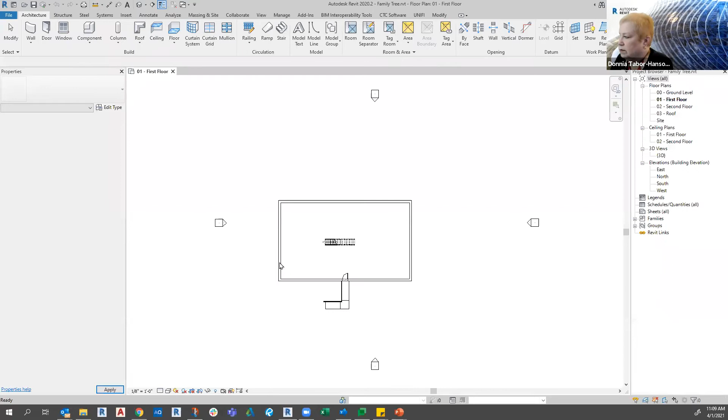So let's pop over to Revit. I'm going to open up my family tree project that I've set up just to play around with. You're going to see some of the basic things that we would see — I've got some walls, doors, a ramp, a stair in here. To see what it is in 3D, you can come here and see what we've got. These are all families that are system families, except for the door and the window — these are all system families built in.

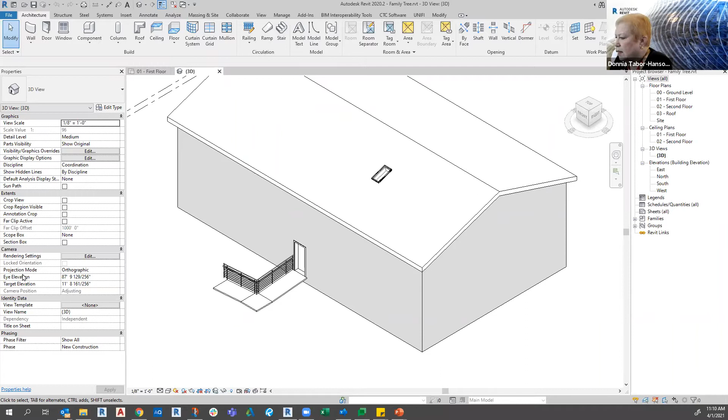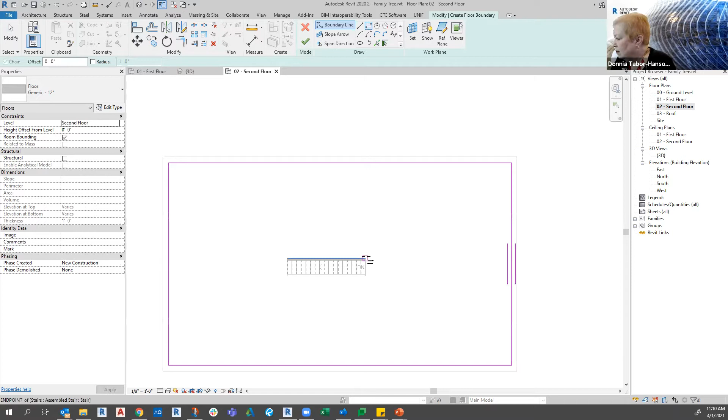So let's go and see how some of these families interact. On the second floor, I know I don't have a floor, so as a system family, I can come up here and go to floor. When I'm on my pick walls, I can hover, tab, pick. Y'all know how to do this. Let's make sure that I get a space for my stairwell.

Yeah, that's pretty good. Well, let's go 10 on that and close it. And then let's just drop a section view. Yeah, we'll let it go ahead and cut into it.

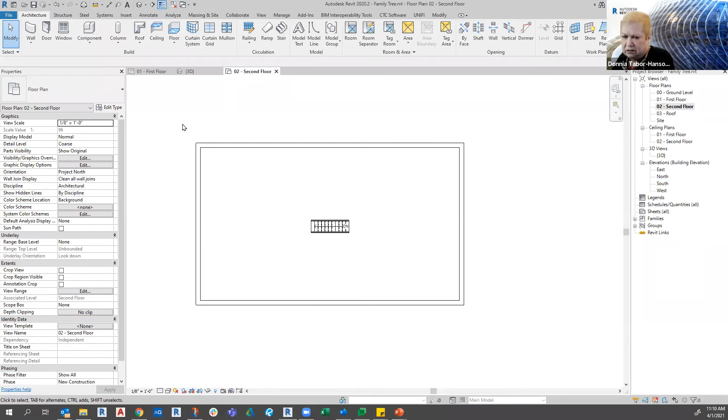See, these families know how to react with each other. That's one thing that's so nice about Revit families is they're not so dysfunctional at times. They actually play together nicely, right? So I'm gonna drop a section in here and let's look at how these system families are playing together and acting nicely. Oh, I'm not gonna see much in a coarse view, so let's go to a fine view.

I thought I told that to interact with the walls. I obviously didn't. No, okay. Anyway, no, didn't mean to go there.

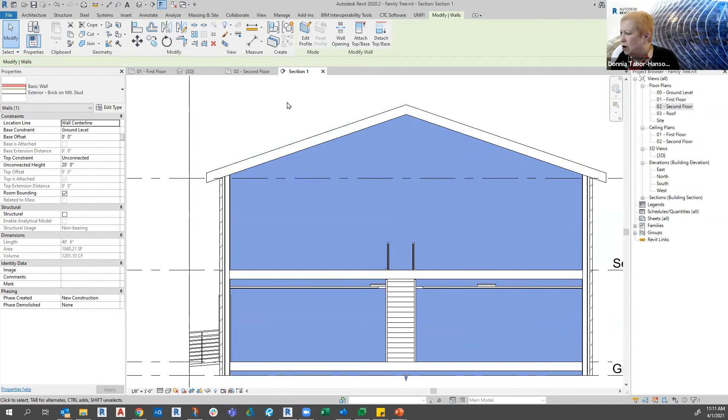You see the wall is connected up here to the roof. I didn't interact my floor with my walls. I'm not going to go back and redo that, you've seen that many times. So, you know, Revit is so smart. It's almost as smart as some of my grandkids. So that's why we know it's very smart and how it interacts with things.

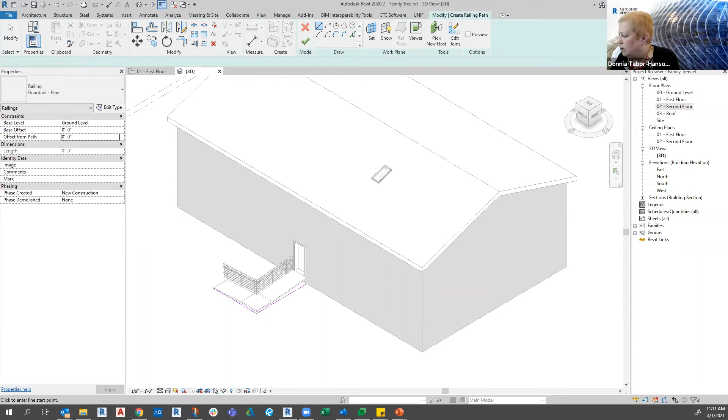And then there's also how we can look at a family that is hosted but is also a system family, like a rail. I'm going to use one of my favorite shortcuts, CS, after selecting that. And then I can just use pick line and come around here. And I know some of you are going, that's not working, right? Because let's see, I'm gonna go out a foot on that.

And when I finish that rail, well, that's not so smart because I didn't pick its host to begin with. So now let's go pick its host. You see how smart it can be? It gets these families going. They're so smart working with each other.

So now let's go look at some of the component families. This is where we're talking about building templates. So for the component sections, there's some components that need a host, like doors, windows, light fixtures. Some components will just go on the current level and they'll be happy to reside there. They're just, okay, fine, you just put me there, I'm so happy.

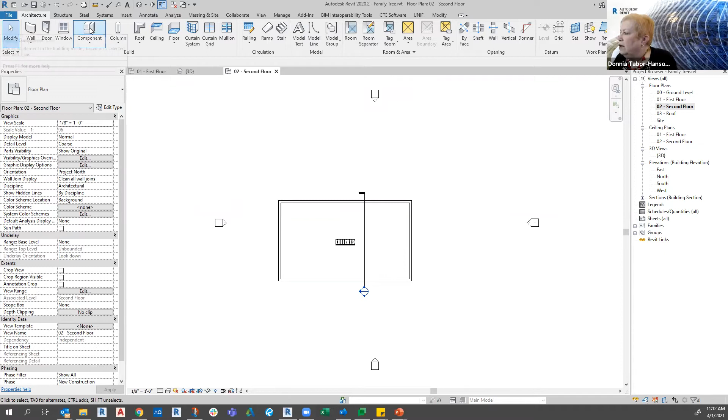And a lot of times these loaded components are loaded from outside of Revit by an RFA family type. And it does matter how you load some of these families. So I'm going to go back over here and let's go to the second floor again. Let's put it on the second floor for some reason. And if you go to component and you say load family, you're going to be presented with where the families are. And let's say I want to go get some windows.

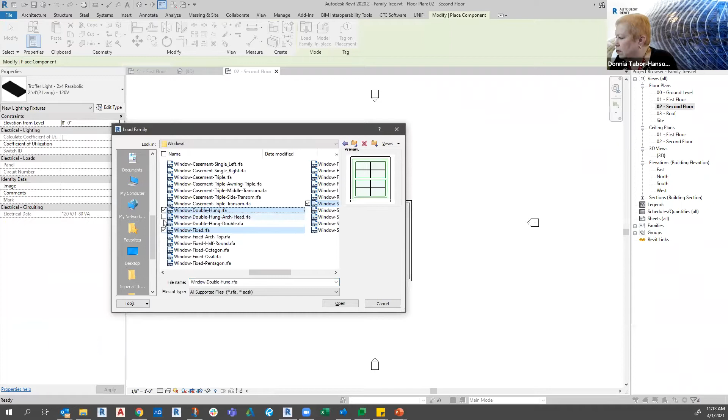I want to get a single hung and some fixed, just a plain fixed family. Yeah, it may be a double hung. And I'm selecting by holding the control key and selecting three of them. And then it brings me up here and I can go to the double hung family and pick on, and somebody just says, oh my gosh, I've never seen that happen before.

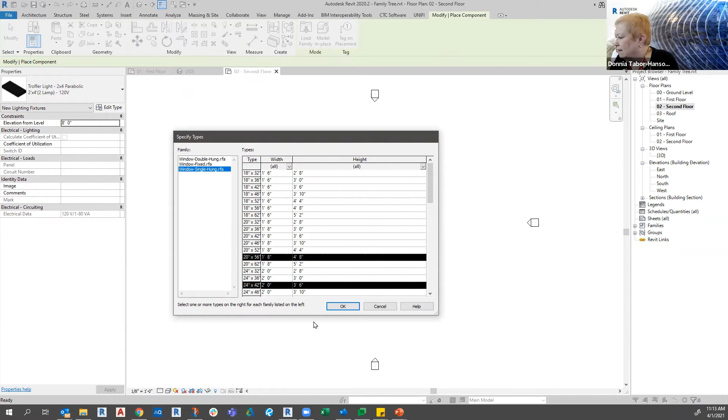You didn't know you could do that. Holding down the control key, I can do this. Go to another family up here and pick hold of some other sizes, and go to the third and pick on some other sizes. And I can load those families.

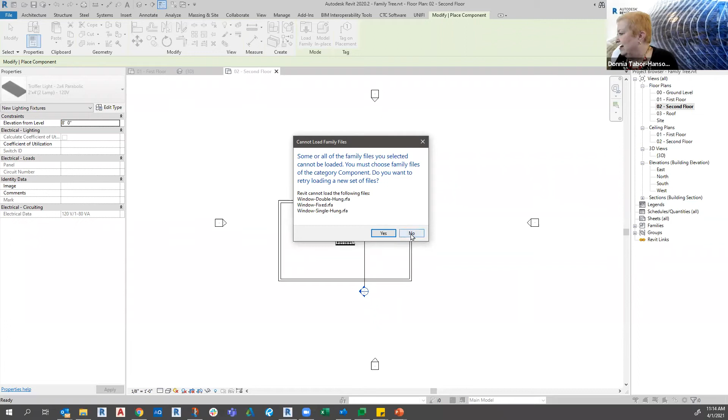And then I can wait for the hourglass to come back after that is done, and give me... it's not going to give me, it's got to process, there it is. There's the error. And some of you noticed I went in through component, load family, and I went to window. You can load windows with that, but you can't put them in with that. Do you want to try reloading? Yeah, no, I'll just do that.

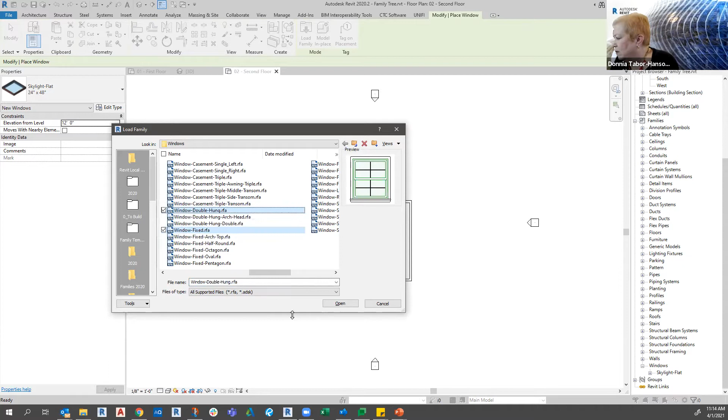So I can come over here and look in my families under my browser, under my windows, and yeah, it didn't load them. So I would have to go through the window component to load windows. So let me go back and just load a window or two. Give me some fixed, and give me double hung. Rinse and repeat. So it's a matter of, you've got to learn where things are.

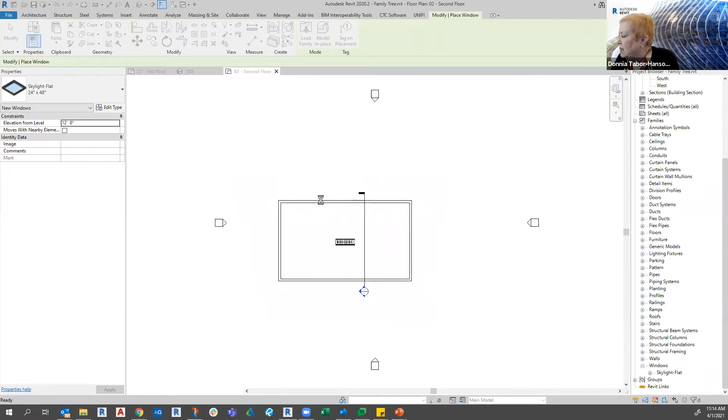Most of you knew that I was going to have this happen, but I did it on purpose so I could show you. You got to make sure you know where you're going and what you're loading. And then once I get some windows in through the window command, it's going to let me go ahead and pick a window.

Pick to the outside of the wall to place the outside of your window. The arrow always shows the outside. I can change the windows here to whatever windows I have loaded and put windows around.

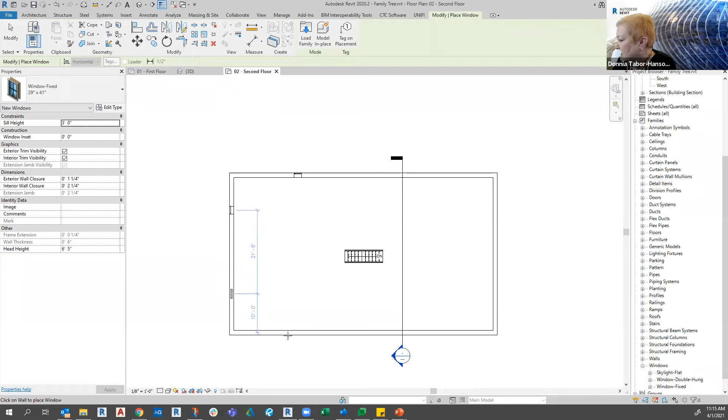Easy peasy. Now, what about other loadable families? Let's just see what I've got in here. I've got a troffer. I should have a desk. Don't forget about the search for families that you can just type in, and someone goes, I've never seen that before.

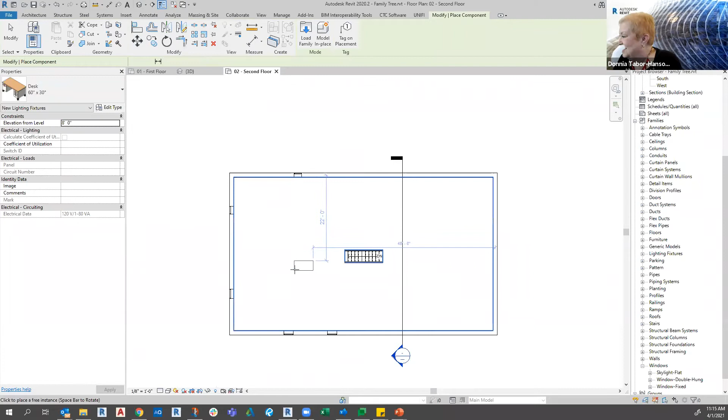Bring in a desk and place it in here. So I'm working with the component family. That desk is not hosted, it's just a family that comes in and will sit right on the floor where it was placed. So that's our loadable families.

Let's go back over here and look at grids, levels, and reference planes. Next month I'm going to talk a great deal about reference planes, starting with the rules of reference planes inside of building families, but they can also be used inside of a project. They are infinite planar elements, just the same as levels and grids are planar elements. So coming back over here, I don't have any grids.

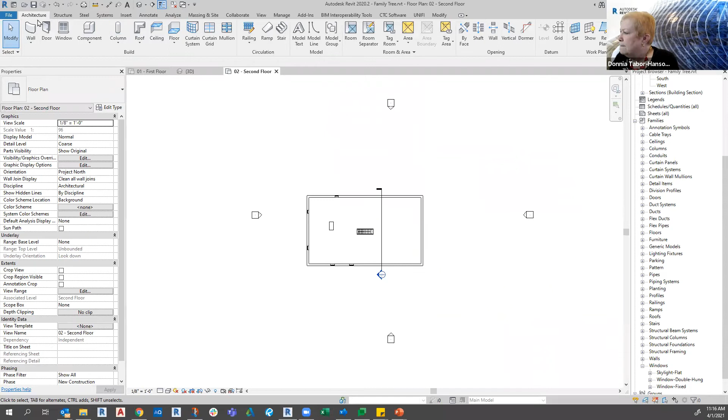If I go to get a grid under architecture, go get a grid line. That tells you I've put a grid line in before practicing this, so I'm going to set this one to 1, and of course the next time I do one it's going to be a 2. Notice how I try to line them up, and it automatically wants to line them up together.

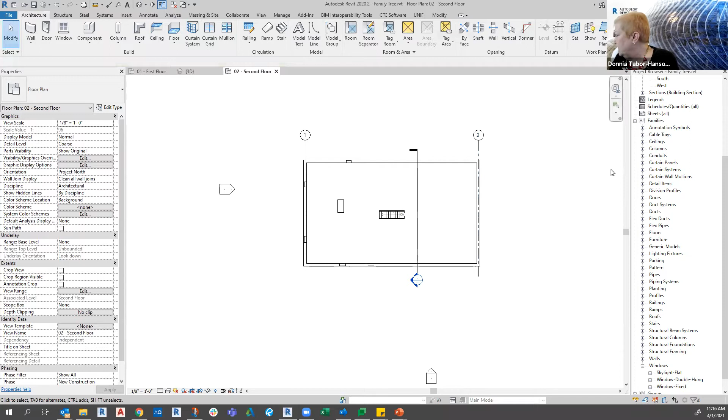And when I go to an elevation - don't scroll there - I can see that they went just above wherever I had some geometry. Well, if this grid doesn't want to go up through there, let me just get the grid. I can pull it down here. Well, it brought its friend because they were locked together. So maybe I need to come over here and unlock this one and pull it up here. Because they're planar, they will only show up within the planes that they are.

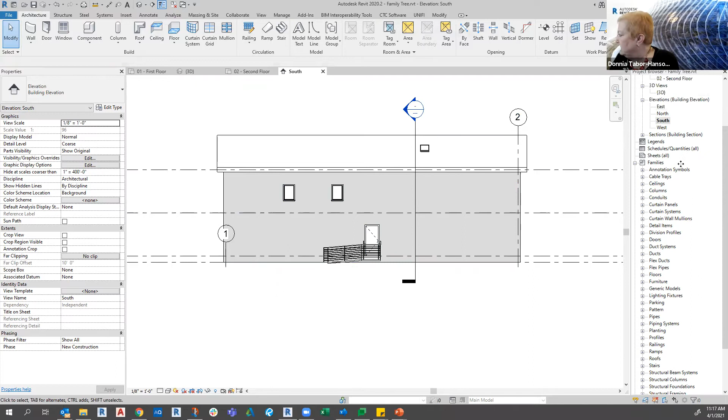So the reason I wanted to do this is to show you that now that I'm on the 2nd floor, only grid 2 showed up because it didn't pass through that floor. It is planar. Now, to really bring home the idea of planar, let's go to a 3D view and zoom out. If you select hold of your level lines, which are also planar, you see it shows you where its plane is. Plain and simple, right? No, I'm sorry - so it is planar.

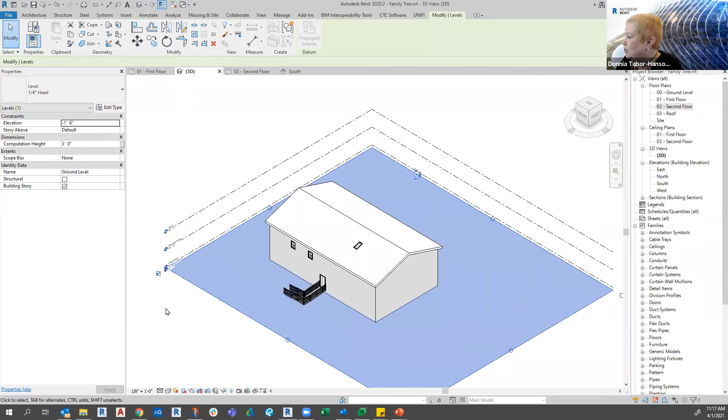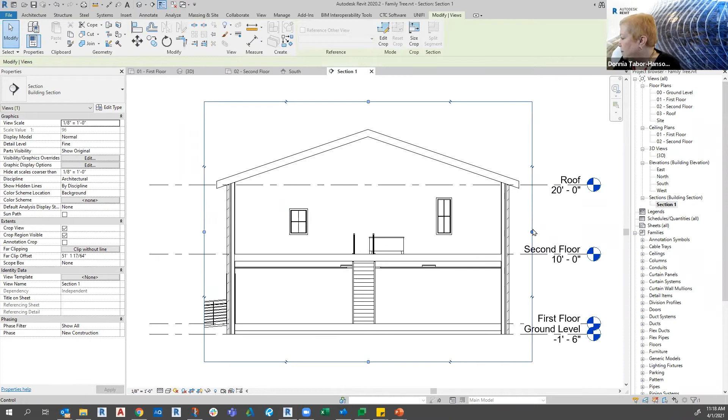You want to make sure that your levels are going outside of your building, but then you'll have something happen - let's go back to that section view. We're going to talk in great detail about these next month when we do levels, grids, and reference planes. We'll have an architect come in here and go, oh, I need a level for a rowlock. So I'm going to go get architectural level and put one in here.

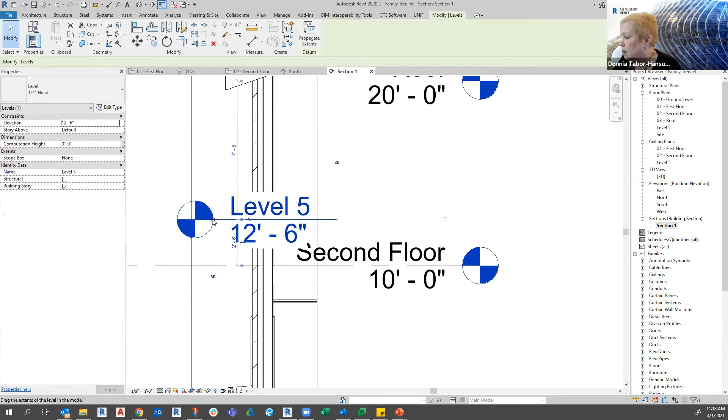Oh, it's going the wrong way. Maybe I should uncheck here. Maybe I should check over here. It remembers which way it was drawn, by the way. It knows which way it was drawn, and it matters which way. We'll discuss all that next month.

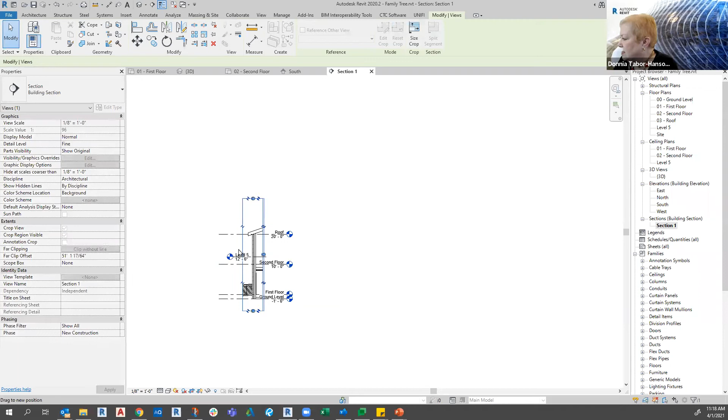But I wanted to do this to show you what happens when you go to a 3D view. Now look at this - it's only in that area. So if I go to do that section view, we decided to do the wall section on this side, I'm going to lose it because it doesn't pass through that area.

Planar. So those are the datum elements that are very constrictive, and they're things that you will use to reference off of and to help lock your project down. So you want to be careful about how they're drawn. Come back next month and we're going to dive into that even deeper.

Now, for the documentation families - documentation in projects is taken care of by annotative families, such as notes, tags, dimensions, and some symbols. Notes and dimensions are system families, so you develop them inside your projects, whereas tags and symbols are annotative components and can be loaded. It's important to note that all annotative families are view specific - they don't show up anywhere if they're not placed.

I'm just going over the rules. I'm going to go over a lot of family rules, and you're going to go, I know that. Well, the reason I'm doing it is to make sure we all talk the same language.

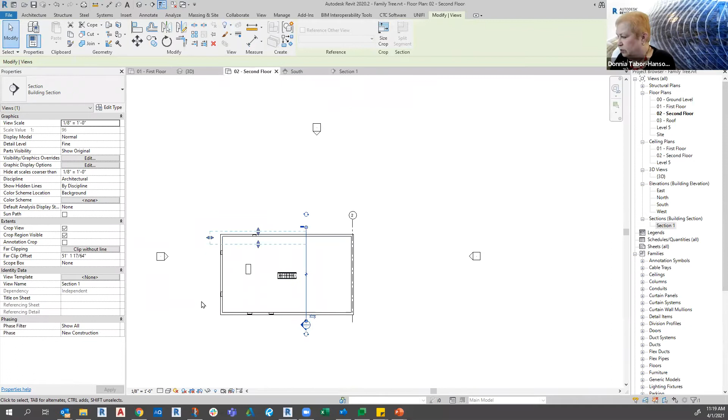So if I come in here and just grab a tag, I can start tagging my windows. See where I changed windows. Tag the desk? Nope, no furniture tag.

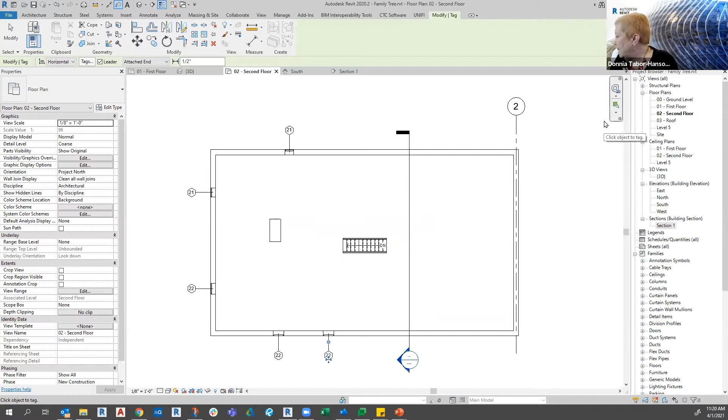Well, how about if I go to, this is, you want to load one? Yeah, I just want to load one now. Go to the first floor. What if I want to tag the rail? TG. You want to load one? Well, how about if I create one?

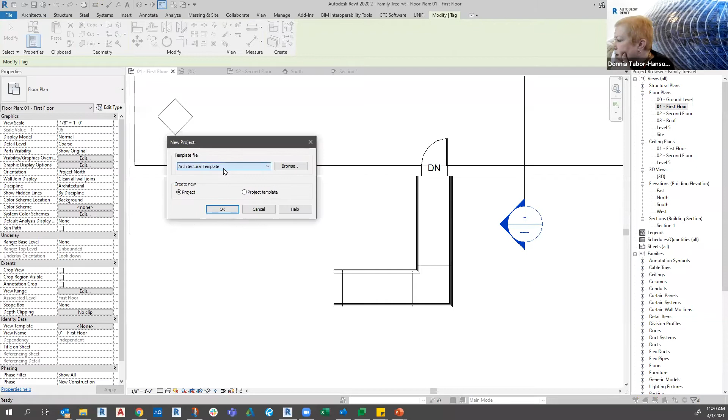If I want to create a tag, I want to say File, New. No, I said new under projects, did not cancel.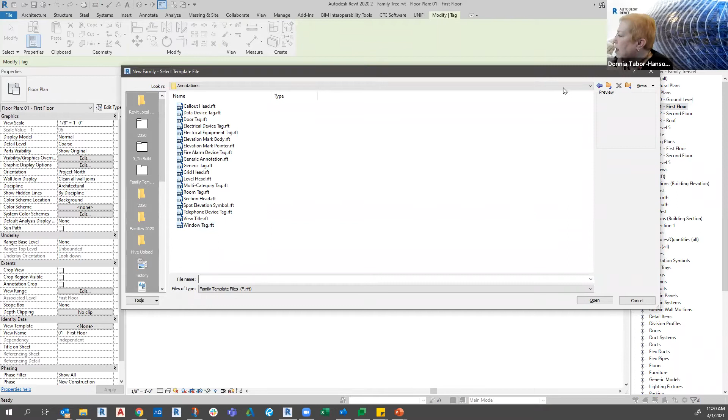File, New, Family. And I want to go to annotations and find me that rail tag. Not that, we'll come back to that, because there's a way of getting to that. I have a reason for doing that, and we're going to discuss that here in just a minute when I do something else. But I just want to make a point: you may not always find what you're looking for, so you may have to learn to create it. So we talk about the model families because we love creating those little models, but sometimes you need to look at your annotation stuff as well.

The next is our 2D dimensional objects, lines, and regions. They're system families, again, created inside the project. But then there's detail components that are loadable RFA families, and they're also view specific.

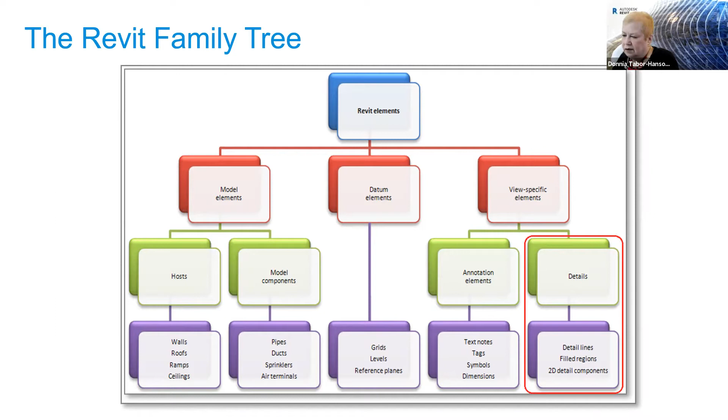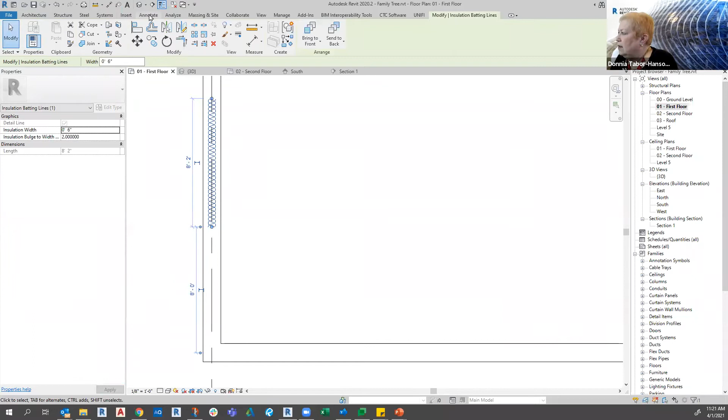So back over here on this, I can go look at under Annotate. I can look at, well, insulation. We'll not, when we put it in the plans, usually in elevation, but I can go get one of those and I can change it out as it needs to be. Put it where it wants. Any of these and a component.

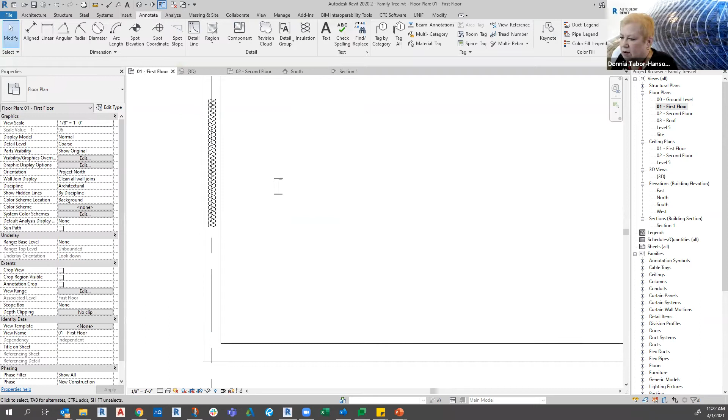Before we start looking at a template, I want you to start looking at some questions, Kimberly, and see if there's anything that is pertinent to what we have done so far that has come in. Or does anybody have a question about anything so far? We haven't had any questions yet.

We did get one. One person said, this is awesome. So great job, keep going. Yeah, okay, all right, any other questions? No, don't forget you can raise your hand, you can call on you, or you can put something in the chat to prompt us to reach out to you. Okay, keep going, they say. Keep going, this is great.

Yay, awesome. So with a variety of templates that are available, you got to know which one to start with. You got to choose one that's the closest match to what the family.

Hey Donnia, we did get one question real quick. Yeah, sorry. Was the family type selector, was that something new in Revit 2020? No. So, like I said, I knew somebody was going to get that one. Yeah, it was like, whoa, that's cool, that search. Oh, so that's why I like to hit around on some things that seems like everybody should know, but then some people may not have run across that before.

It's always fun. Okay, so with a variety of templates available with which to start, you got to choose one that's closest match to the family you're going to build. And there are so many to choose from, but you want to make sure you're going over: is it going to be a hosted family? Does it need to connect to a wall, a door, a ceiling, a floor, something? Is it not hosted? How about a profile? Let's not forget profile families.

So let's jump over to Revit and let me open that. Oh man, I just did the wrong Revit. Sorry, my 2020 - I must have moved it on my screen. This is so much fun.

Okay, so I'm going to go into this view and look at the difference between a generic and a specialty, or it could be a plumbing or any other family. Some families will let you cut through them in a section, some won't. And I can look at this in a 3D view and show you what it's shaped like.

I can see I've got rolled edges. I've got a dump sink in this one. I have a big backsplash. These are the turnouts that go in, these ends go into the dishwasher, that's why it turned like that. But when I go into the plan view, let me go ahead and bring up this section view.

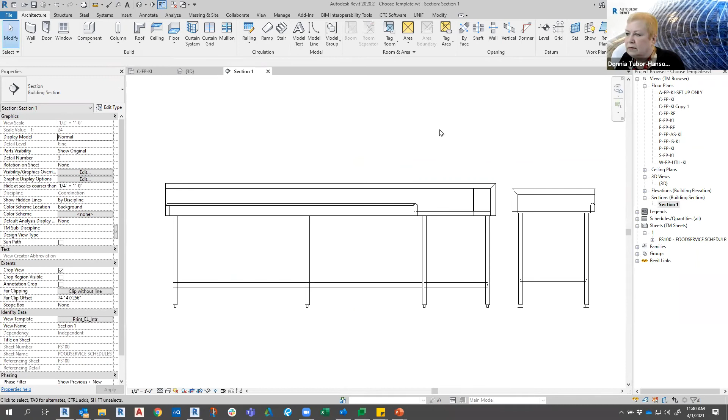And with them side by side, let's keep an eye on this little view right here, because that's the generic view. And when I take this section view and start moving it back, oh look, now I can see the sink. The view on the specialty equipment does not change.

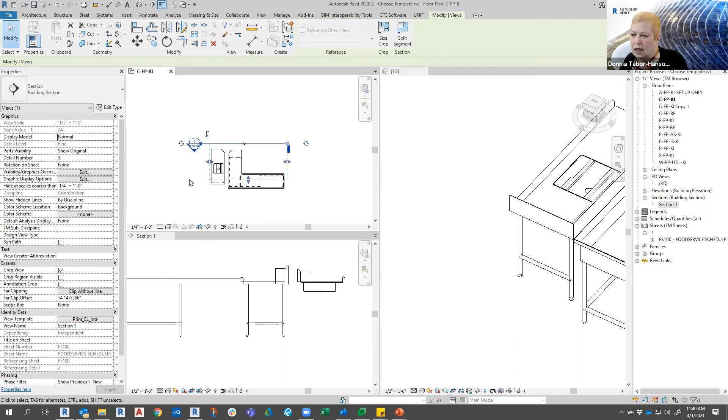The specialty equipment will show you front view only, no matter how far out I go. Even when I quit cutting, now it's because of the cut plane. I just took that out of the crop region. So even then, when I turn it around, if I flip this, I'm now seeing the back of that view.

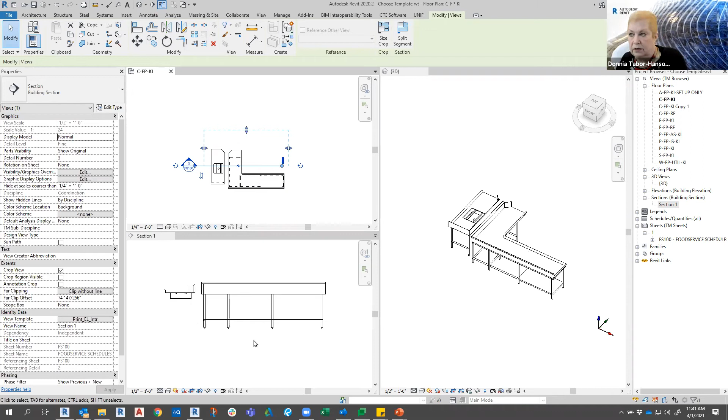So it does matter, you need to know the rules. Generic models will let you cut. So they do like their tables to be cut sometimes in their dish rooms. So I make generic models a lot out of some of the dish tables that we use. So you got to know the rules. How is it going to work? Does it do this? Does it do that? Know your families.

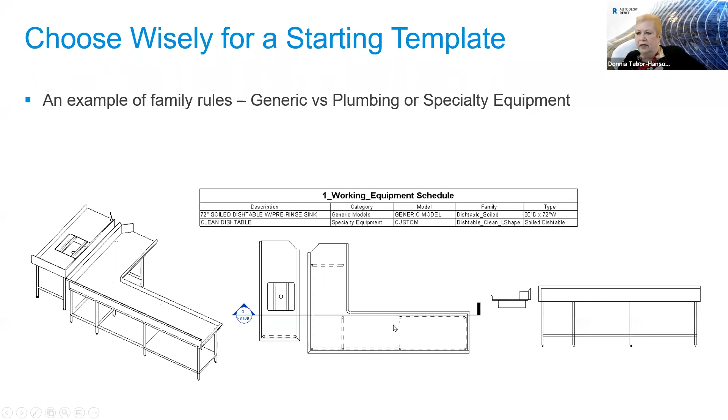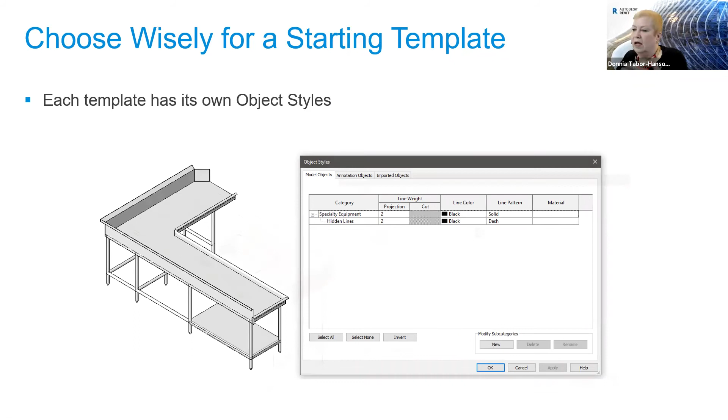Also the one thing you need to do is look at, each template has its own object styles. So when I go into my visibility graphics, I can have specialty equipment with the hidden lines and such, but then I could also have generic models with hidden lines and such. So that's going to fill up your visibility graphics with the different ones, no matter what you have in there. And you can do all kinds of that.

Now here's a fun one. We do a lot with clearances and we do specialty equipment. Notice I have 1, 2, 3 different clearances. One of them is misspelled completely, but I didn't build that family, just so you know. Our clearances are the ones down here that we use. All of our clearances have 'clearance', not 'clearances'. And all of our details have 'details', and then we have different things.

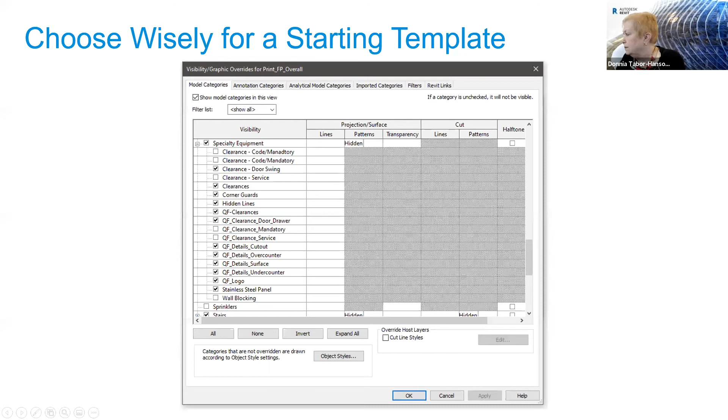So I'll find, like, here's door swing up here. I would use 'door and drawer'. So it's a matter of, by having your own template, you're going to eliminate the chance that somebody's going to mistype something trying to put something in. You're going to have more control over how your different subcategories are going to be set up, because you're going to be the one controlling them. So you want to choose wisely when you're starting a template.

And here's my plan for today's template. I'm going to do a plumbing fixture. For this type, I need plumbing. I'm going to do a floor drain. It's going to be floor based, so I need it to connect on the floor. I want to make sure that materials are the same that I use in all my families, so that my clearances and stuff are always set right, the right color, and my stainless steel. Goodness knows, I got to use a lot of stainless steel, a lot.

So I get my object styles also to match. I want to make sure my project units are set up to fractional, because that's what we work with. And it's really fun when you're doing catalogs to know you got to make sure it's set properly, because one of the first families I made when I came over here was a shelving family. When they put it in, it came in 12 times the size, because I had not compensated for inches in my family. I made it in feet, and that wasn't nice. So it is important to know your projects.

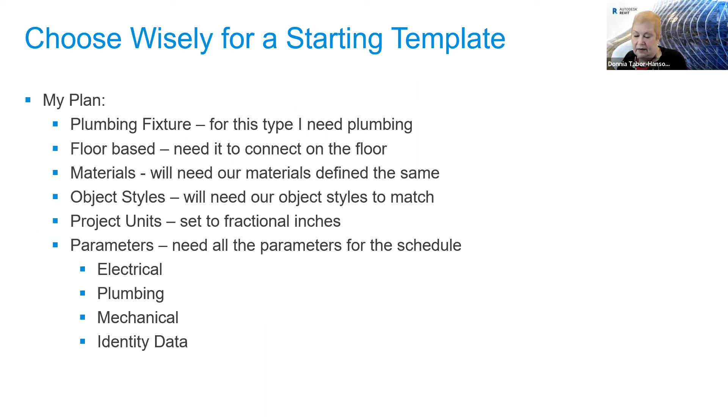And then I want to make sure I need to know all my parameters. You need to know what is in your schedules, your electrical, your plumbing, your mechanical, for me, your identity data. It's got to be put in there properly. So with that in mind...

I'm going to go get me a plumbing floor-based, but there's not one. When I go in there, I see plumbing fixture, but then over here, there's a generic model floor-based family that I can start with.

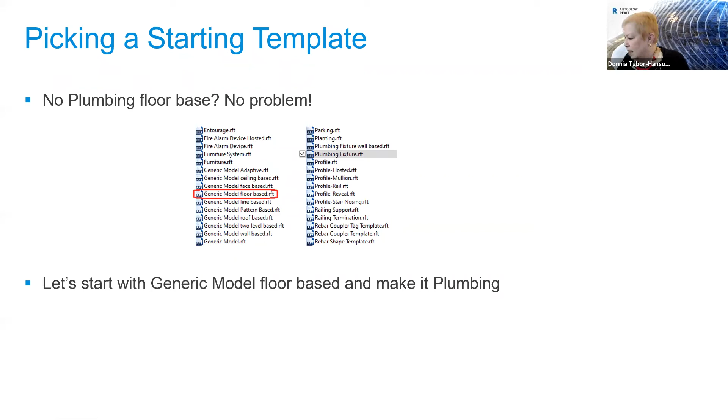So let's start with that and let's make it a plumbing. So I can get out of here. We're done with, no, I don't want to save you. I'll use and abuse that one later.

So let's go here to a new family. And I'm going to go get plumbing fixture. Nope, what did I say? I'm going to get generic model floor-based.

And in here, I've got a floor base. I hate that I can't do anything with those lines that are in there. I don't have any parameters in here. You can see I've got some identity data, but basically not the parameters I need, and it's not the size or type I need.

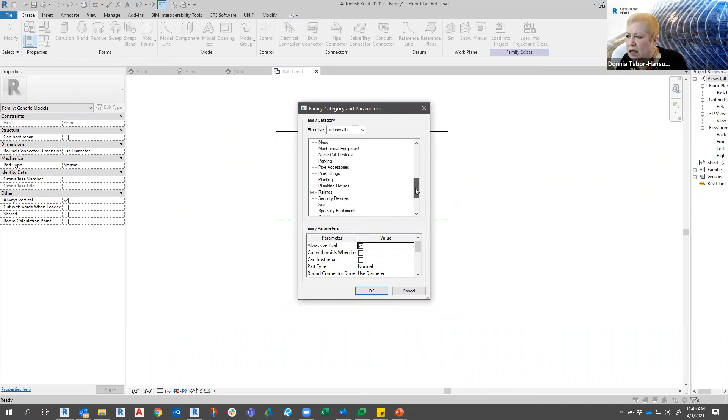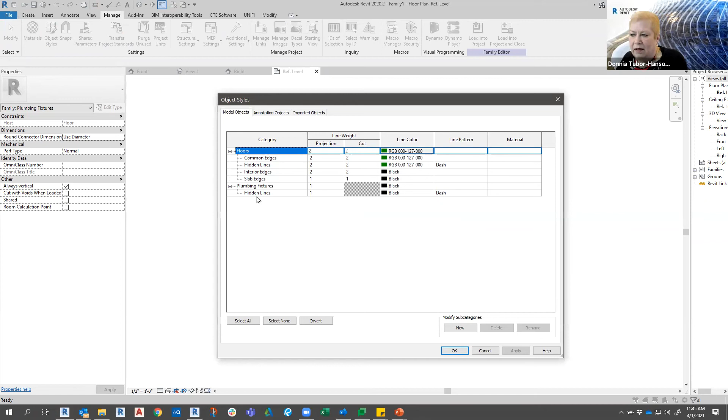So I'm going to tell it now that I want you to be a plumbing fixture. So now when I go in here, I have got plumbing fixture information. When I go to my object styles, I have my plumbing fixture categories built in, since I've changed it over to plumbing fixtures.

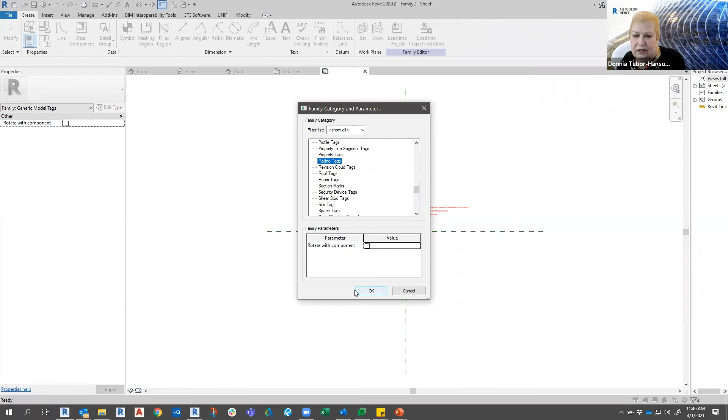So let's talk just real briefly about that tag again. File, new, family, annotation, generic tag. I want to be a tag. They didn't have a rail tag, so again, with that rail tag, I can come in here and make a railing tag. You can see they don't have a family template for everything, but you can probably get one close and change it to that. So that's why I wanted to mention that railing tag early, and I told you I'd come back to it. So I did.

So once we get in there, you know, I made it plumbing. After choosing a template to start with, let's start by setting up the things that you need: basic common attributes and stuff for the family, like my project units, minimal dimensions for a typical family, object styles that I'm going to need, the materials I need, and my shared parameters that I want to have in my template all the time. Most of this is found on the Manage tab.

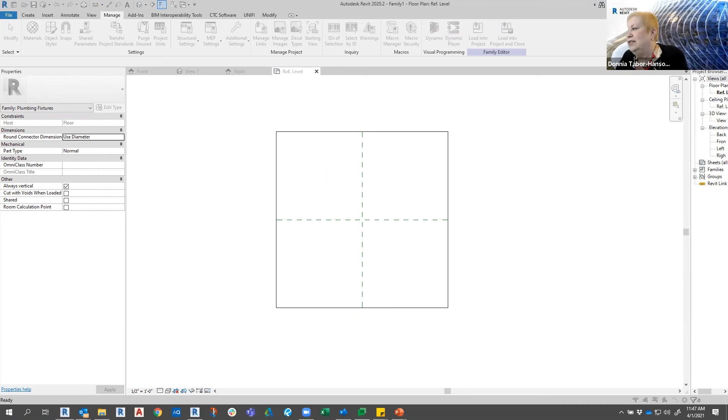So I'm going to go back over to Revit, and I start here with the project units. And everything's popping up on the wrong screen now. I come here, make sure that I've got my fractional inches. And I'm going to go and open, I've got a family materials project. This is a nice little hint to have. It's got the materials in it that I use a lot, and the line types and stuff that I use a lot.

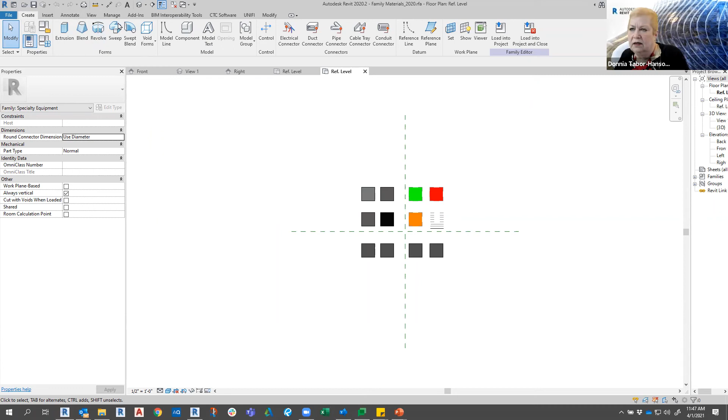So I'm going to come over here to this family, and I'm going to use transfer project standards. I'm going to transfer, check none. I just want materials and objects over. So now I've got override. Now I've got the materials and object styles that I want to use all the time. Remember, I'm just making a template. I don't want to build anything yet.

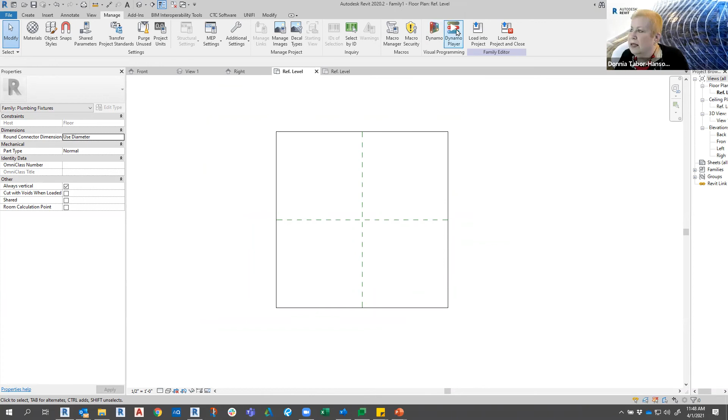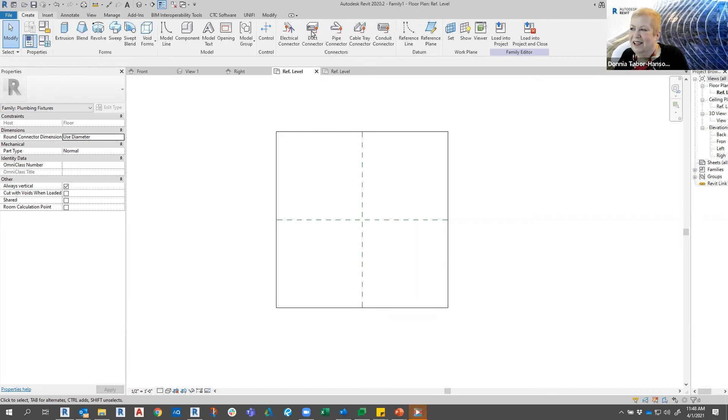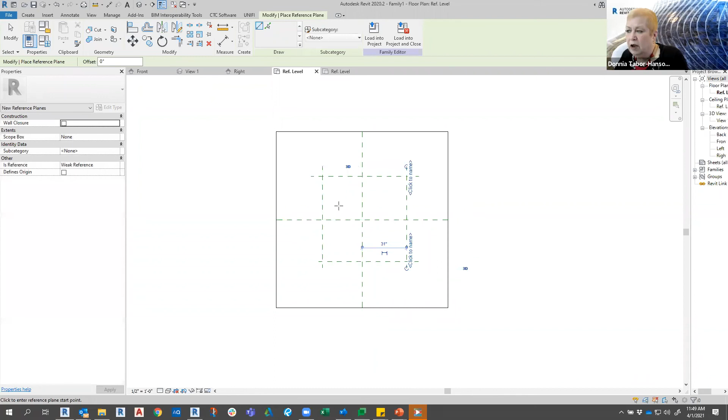There's rules about reference planes that you may or may not know about. It depends on which way they're drawn, it matters which way that they are set up. Equal that out. Some minimal things would be just to give me my width, my depth, and my height. Notice I did not call any one of those length. I did in some of my first families, I admit it. But when you think about it, they're all lengths.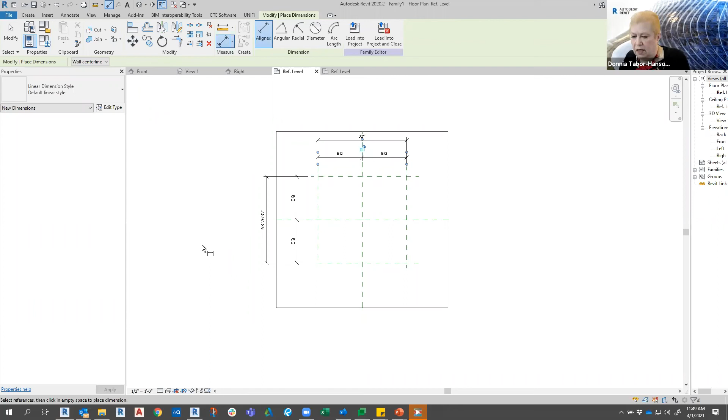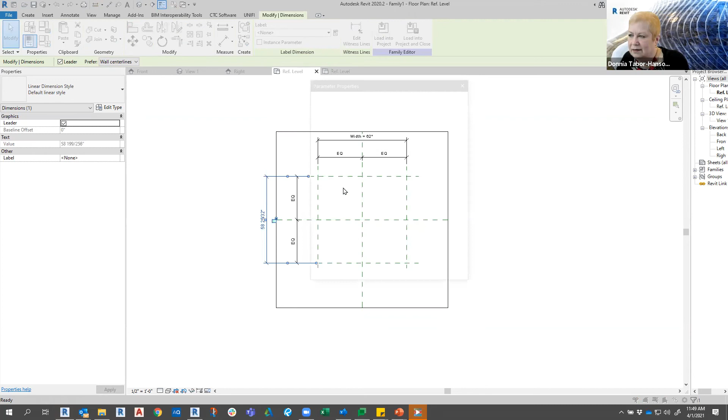Matter of fact, when you go to put a parameter on one of these, guess what category it comes up under? It's a length. So this would be my width, and it's going to be a type. This would be my depth, and it's going to be a type. And then I can go set these to about the average of what I would do, and 58 is probably too big. Let's go down to 24.

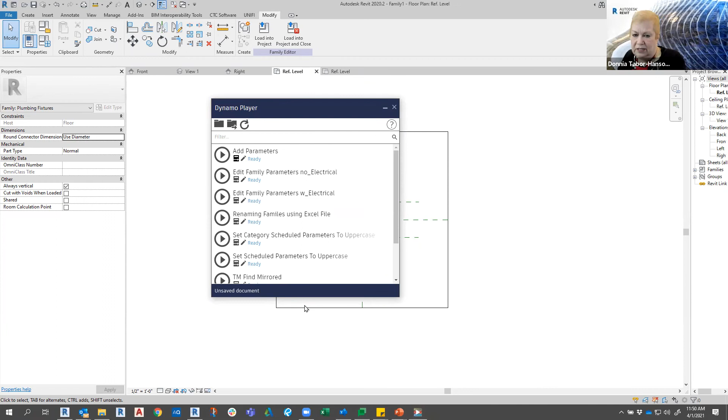Now, to get my parameters on, I'm going to show you a little bit about this. I've got a dynamo I'm going to share with you where I got it. It's the Aussie BIM Guru, some of y'all might know him. I'll put that link in the chat where you logged in and signed up for this conversation, along with links to the videos.

We're going to actually discuss these a lot next month. So I'm just teasing you a little bit with them here.

I've got all these things here. I can go add electrical parameters, electrical and gas, cold water. I just want my indirect waste. This is a drain, so I'm going to do indirect waste, and I'm just going to run this little rascal.

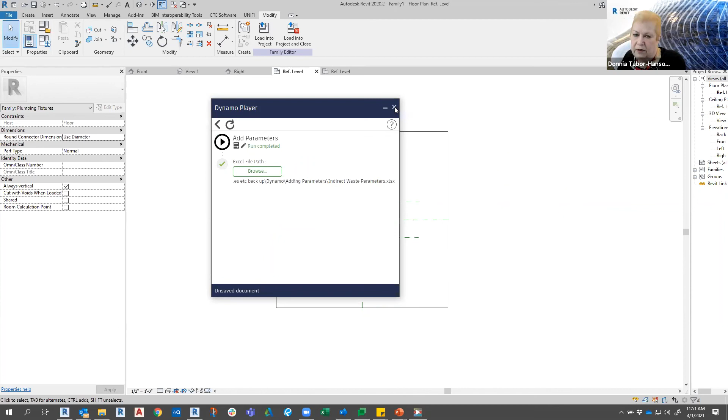Then we're going to go look at the parameters that I've got, and you're going to see that I know everything of my indirect waste parameters that have to go in my schedule. So I put them in an Excel sheet, and there's a way you set the Excel sheet up, and sure enough, here's all my indirect and my plumbing remarks that I would need.

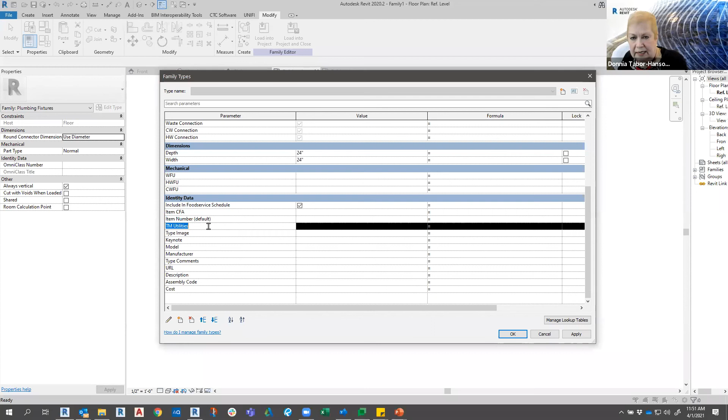I've come down here and I've got my food service schedule, my item CFA that we use for chains, that's a chain and the item number. If it's not a chain, my TM Utilities is a parameter that we use to help sort things into categories for schedules or view templates, gives them color and stuff, and we can talk more about that. But this is the parameters I need to have set up in there.

And all I did was run a dynamo, and that is part of next month's discussion.

Hey, Donnia. Yes, real quick question. There are some questions that came through. Okay, first, are some of the shared parameters that you loaded, or some of the parameters, are you load? Let me start over. Are some of the parameters that you loaded shared parameters or family parameters?

The only family parameters I had were the width and the depth. My power turned off too. The width and the depth are the only family parameters; these were all shared parameters.

We do have some custom parameters. Parameters is a big subject next month.

The shared parameter file, I believe it should be locked down and not—why are you laughing? Yes, I'm in control. I agree, I have the shared parameter. Yeah, it's not something you want to have everybody run loose on. And I will tell you how we got ways of letting people have some flexibility and stuff. That's next month, so got to keep coming back.

So the things I could steal from: the object styles, the materials. I added my reference planes and dimensions, and the parameters were minimal for dimensions. And then I added my shared parameters that I use. Yes, we will discuss the dynamo in an upcoming community conversation.